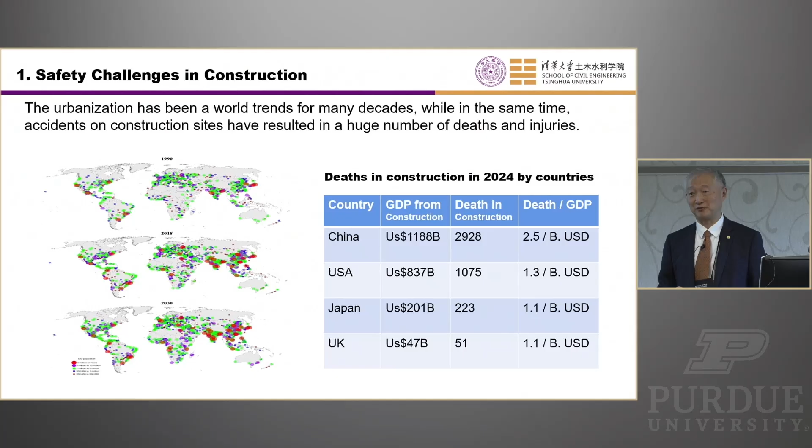So this is the outline, and we start from the safety challenges all over the world. As everybody knows, urbanization has been a world trend for many, many decades. And at the same time, accidents on construction sites have resulted in a huge number of deaths and injuries, no matter where. You can see some of the countries. In many countries, in the past decades, there's almost no improvement in on-site safety.

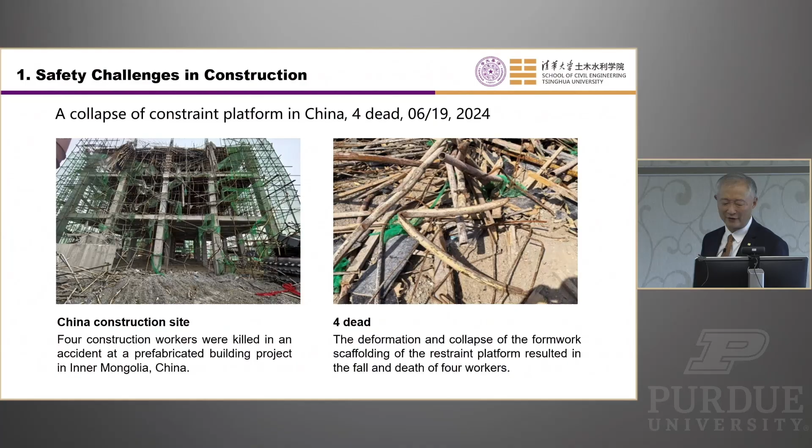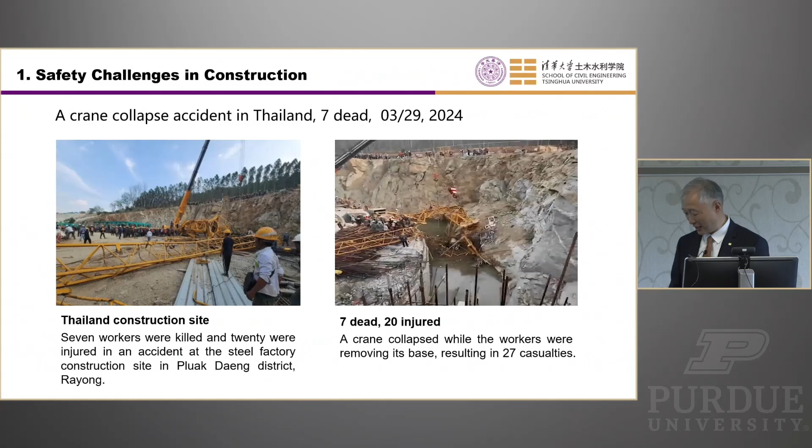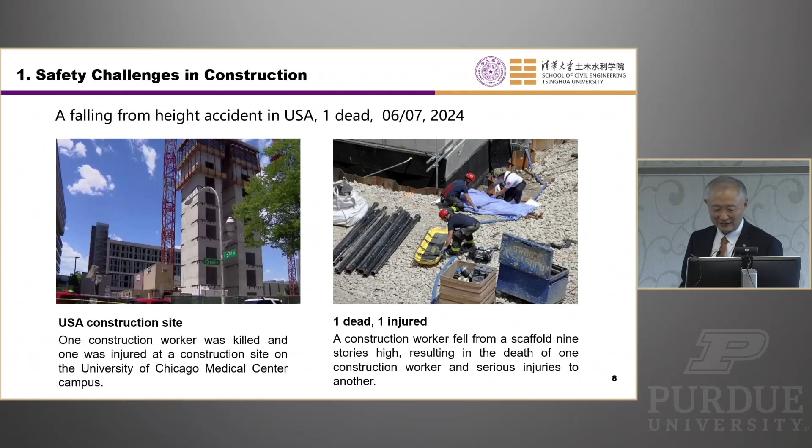And look at a few of the cases. This is a collapse of a constraint platform in China, 4 deaths, and 4 dead after a scaffolding collapse. And a crane collapse in Thailand killed 7 people. In the US, I'm not sure it's correct or not, but I think it's from the website, we got 1 death last year from falling from height. And we have more in Singapore, in many, many countries.

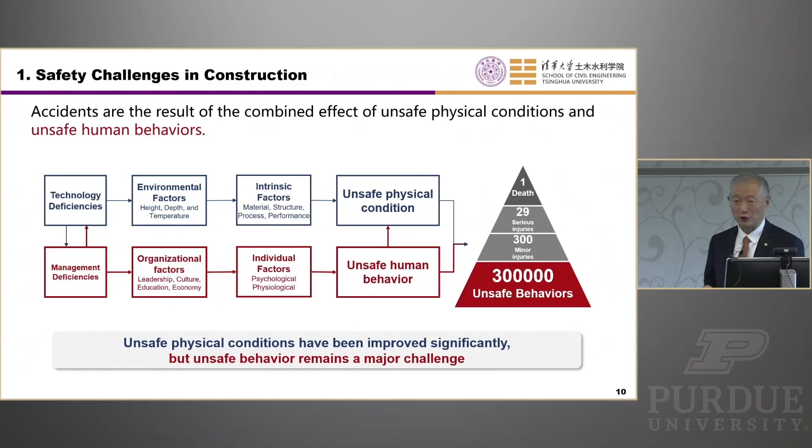So accidents are the results of a combined effect of unsafe physical conditions and unsafe human behaviors. Physical conditions are easier to improve rather than human behaviors — this is our belief. But if we look at all the statistics, unsafe physical conditions improved a lot, but not the same for unsafe human behaviors.

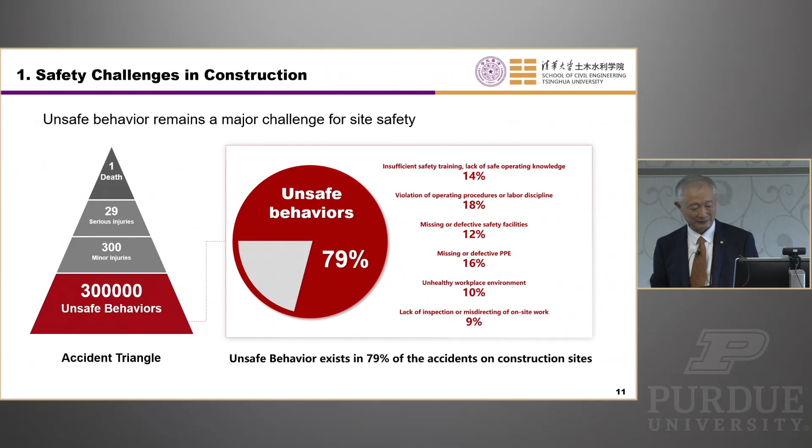So this is one year's statistics from China. We can find that nearly 80% of the accidents are related to human behaviors. And our work on safety started about 25 years ago.

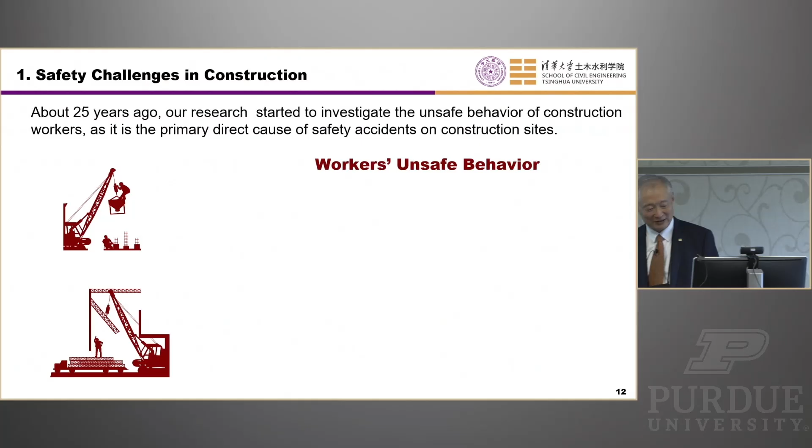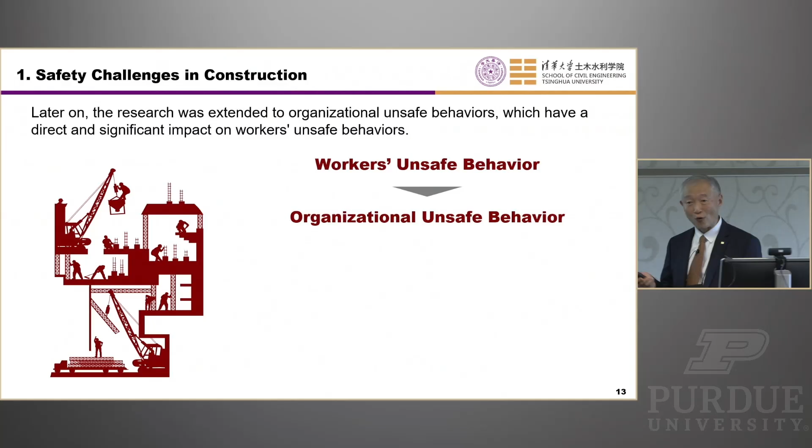At the very beginning, we started on the workers' unsafe behavior. Then we found that organizational unsafe behavior actually is more important. And further research found that safety culture and leadership play a very important role on unsafe behaviors. So based on this understanding, we start to look at the root causations of unsafe behaviors.

Based on so-called cognitive psychology, we separated the process of cognition into 4 major stages and tried to look at what kind of failure of cognition happened in the 4 stages, with 2 critical questions: in research, how to reveal patterns of unsafe behaviors at the cognitive level; and in practice, how to reduce unsafe behaviors from the cognition process. So the cognition process is behind the behavior, and we regard this as the root cause of unsafe behaviors.

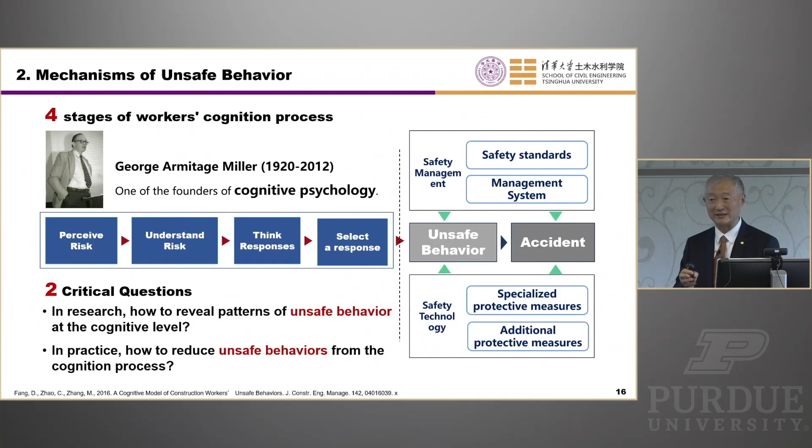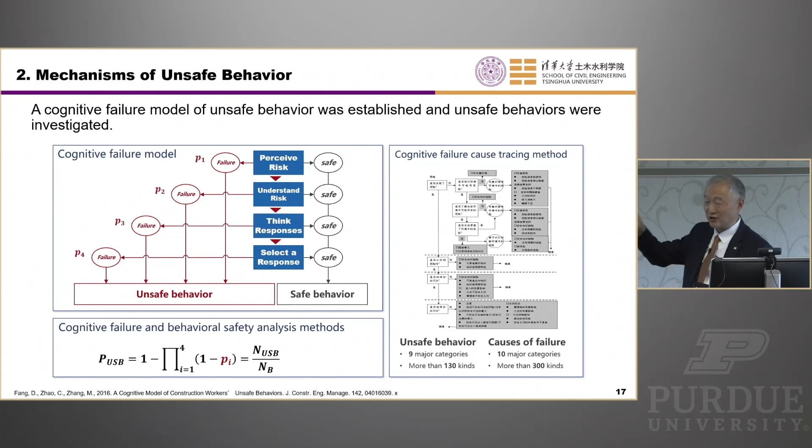So a cognition failure model was established to analyze the root causations, and this is the flow chart for us to identify each of the causations of unsafe behaviors.

And what we found, there are 2 kinds of failure mode. One is the so-called unintentional — that means the workers did not find and did not recognize there's a risk. The second is the intentional failure mode — that means they know the risk, they know it's harmful, but they still do that because they want a shortcut, they want to save their time, and so on.

Especially for project managers, they want to save money, they want to control the cost. So the unsafe behavior here, by definition, not only includes the workers' unsafe behavior, it also includes managerial unsafe behavior or decision-making.

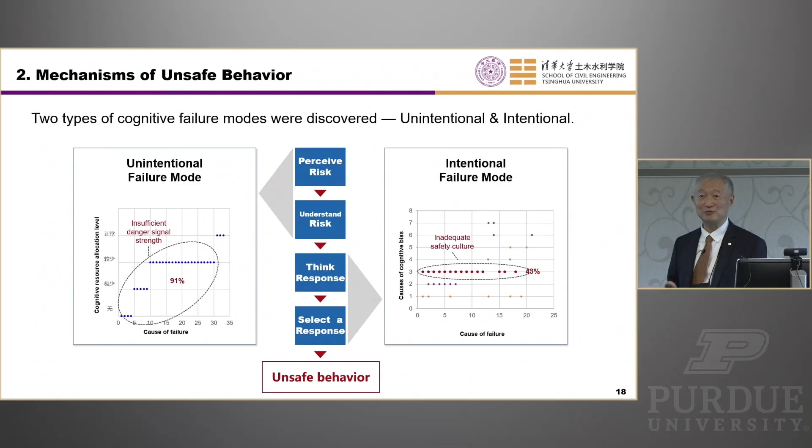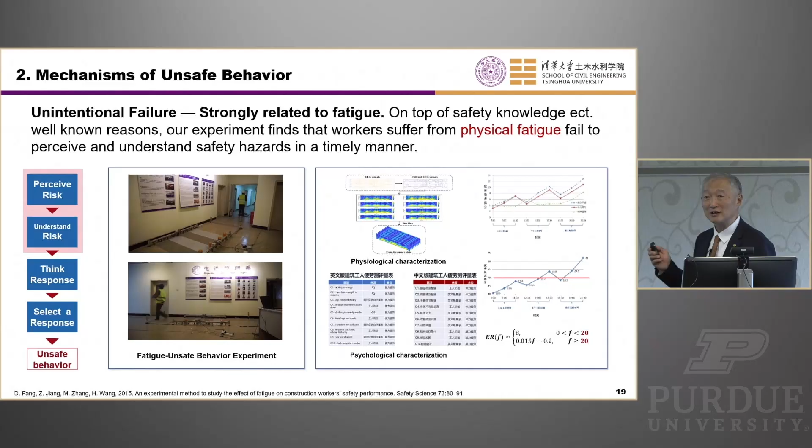So based on this, we looked at fatigue. That is one of the major reasons why the workers ignore the risks, both physically and cognitively. Cognitive fatigue is one of the major causations that we found.

There are a lot of research details I want to skip because I have only 15 minutes. So this is what we found: cognitive fatigue produces about a 2-fold increase in cognition errors and a 3-fold increase in behavioral errors. So cognitive fatigue is one of the very important reasons.

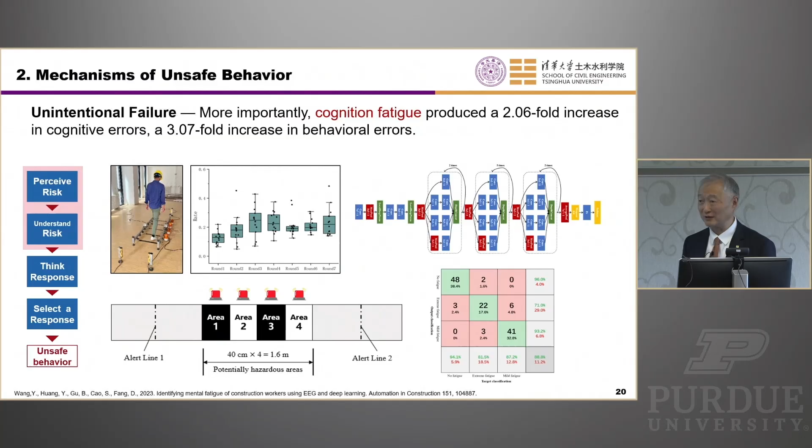On the other hand, for intentional failure, it's about culture. A better safety culture may help the workers make the right decision, and vice versa. So we established a model for safety culture, which we call the safety interaction culture, because on the construction site we have different organizations. They work together and bring different cultures to the site. There's a huge conflict within the culture aspect. So how could the project manager converge all of these cultures and build up their project culture in the right way?

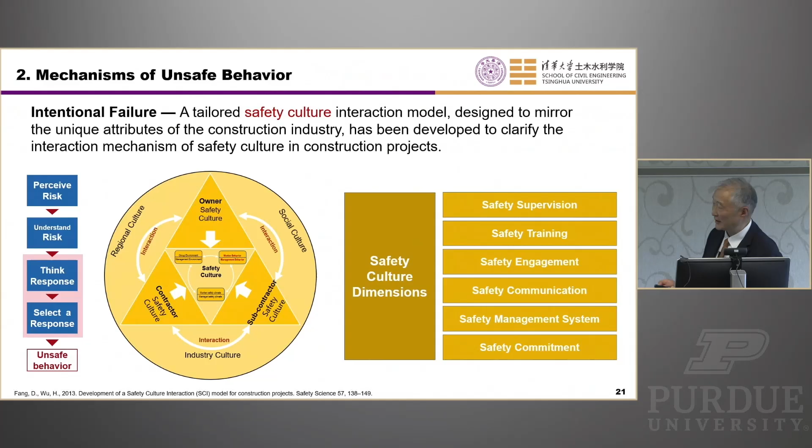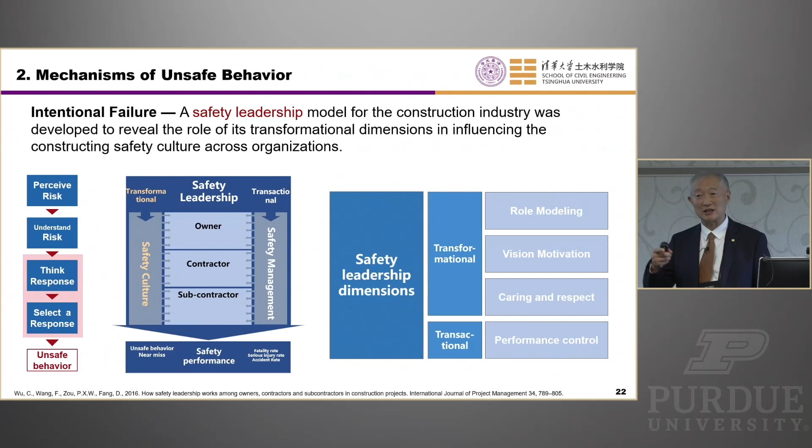We did a lot of surveys to try to dig out the key factors that influence behaviors. On top of culture, safety leadership was found to be one of the major factors that drive the change of the culture. So again, we did a lot of investigations on what type of safety leadership could create a better safety culture.

In the end, we found the role that leadership can have to influence safety culture in the right way, and further, the culture can influence the workers' and even managers' behavior. So we did an intensive survey of about 10,000 people whose unsafe behavior we observed, then talked to them with a questionnaire survey to find out why they made a mistake. Based on this analysis, we found the leadership, culture, and behaviors relationship.

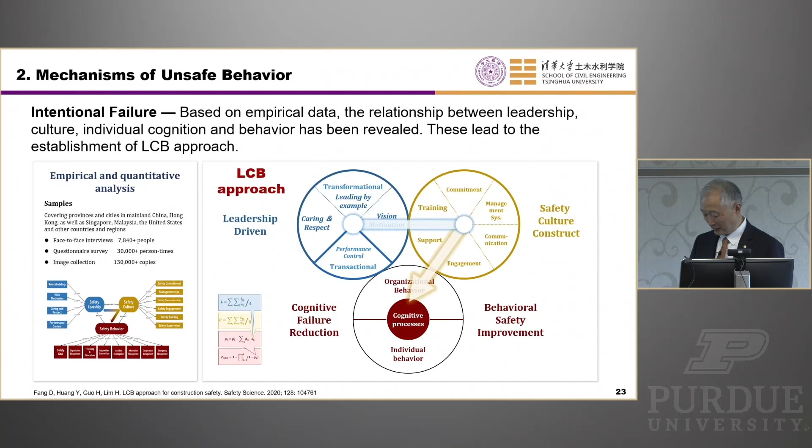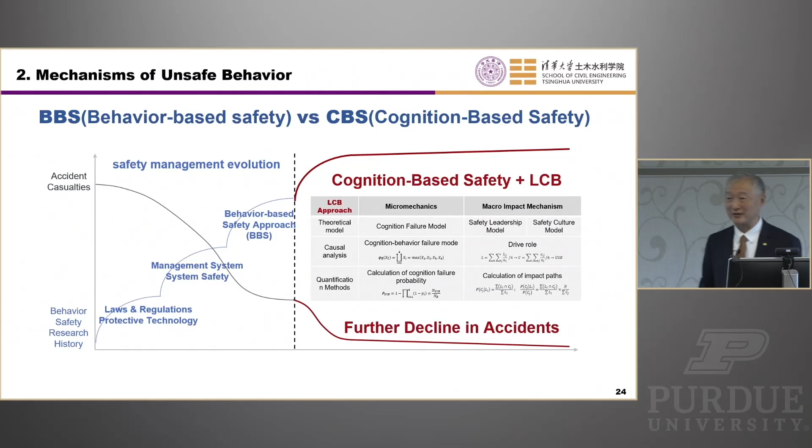Based on this, we started to develop approaches we now call the LCB approach to correct unsafe behaviors induced by either workers or managers. We hope that cognition-based safety can be a further step beyond behavioral-based safety, because cognition is the first step of unsafe behaviors. Based on this research and understanding, we started to develop relevant technologies to tackle this issue.

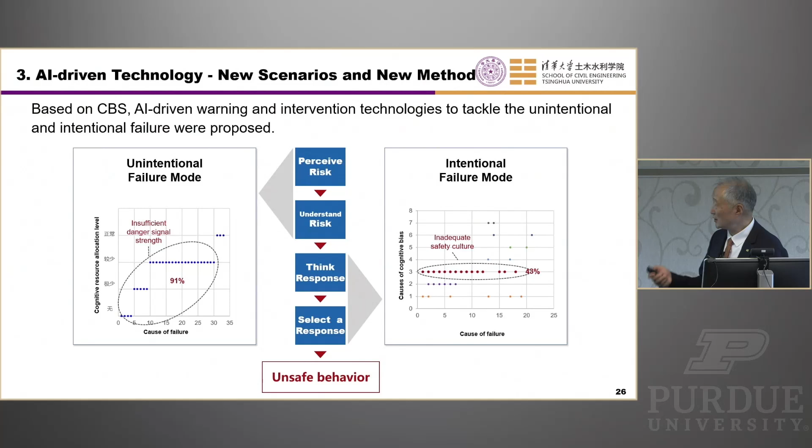This is what we identified as two kinds of failure mode. For the first one, unintentional failure mode, we tried to develop various kinds of technologies, either EEG or computer vision technologies, to early warn the workers about their unsafe behaviors. These technologies were developed by my students, and two of them are sitting here.

We have one technology based on EEG, which detects the fatigue of the workers. The second one is based on computer vision. And the third one is also computer vision based, but we use deep learning to identify unsafe behaviors. This equipment can be installed on any kind of equipment, and now it can not only detect the distance with the workers, but also recognize their unsafe behaviors.

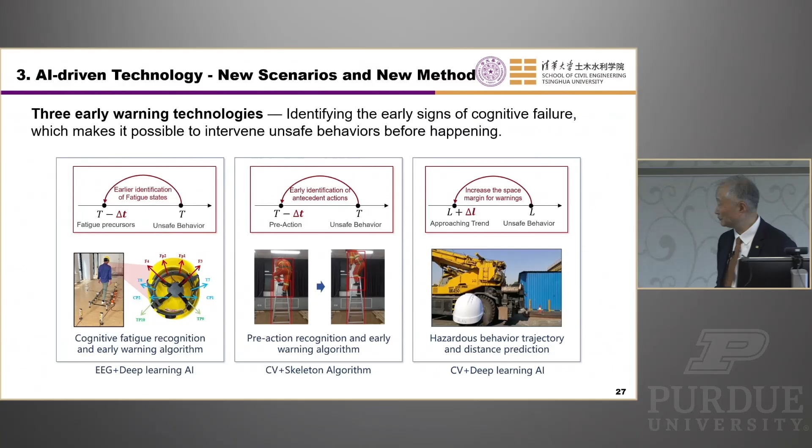On the other side, for intentional unsafe behavior, we developed two software tools related to safety culture and safety leadership, as a kind of survey tool to identify the defects of managerial factors amongst organizations. We also developed standards for safety culture and safety leadership assessment that can be used by industry, enterprises, and project teams.

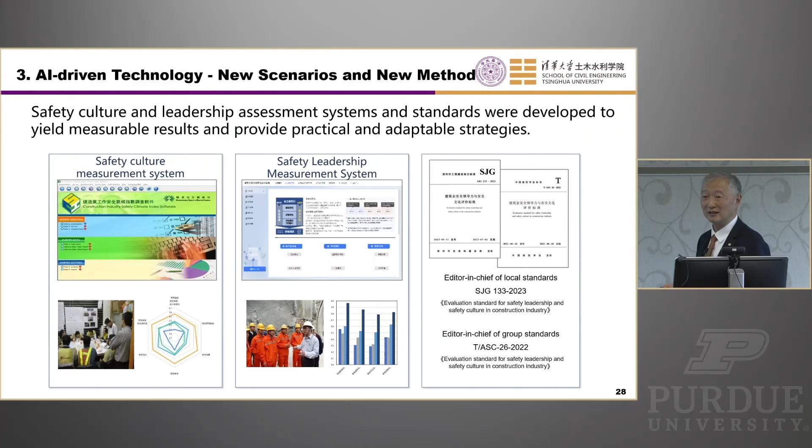Based on these two kinds of technologies, we tried to integrate them together into what we call BeSafe. It's an AI-driven safety management system based on technologies that detect unsafe behaviors, and we also have the LCB tools—that means the leadership and cultural survey—on the cloud. We connect all these technologies, so it's not only good for detecting behaviors, but we also provide approaches to solve the problem, to cut the root cause of the unsafe behaviors.

In many cases, we do have new technologies, good technologies, but the site doesn't want to use them, even if they implement the technology on the site. The workers may not like to use it because they feel uncomfortable in many ways. So if, on top of the technologies, we create a better safety culture, then the technologies can be implemented more easily.

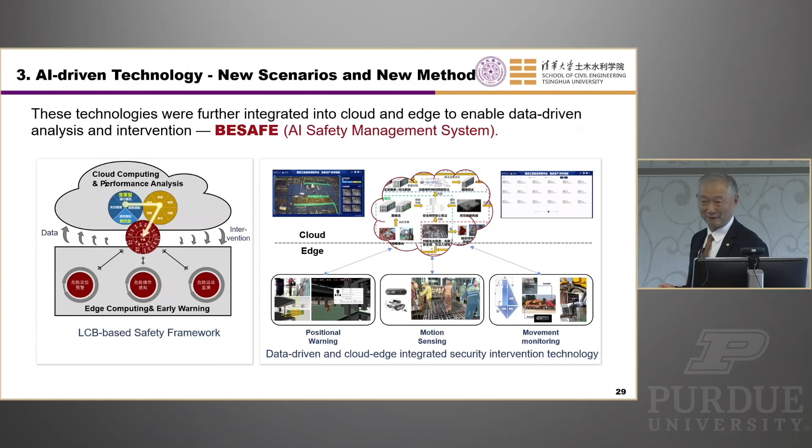So we tried to put all these things together. We call it BeSafe, the system. This was recognized, 2 or 3 years ago, by the Construction Innovation Award in Hong Kong. Now it's also implemented in Hong Kong in some of the companies.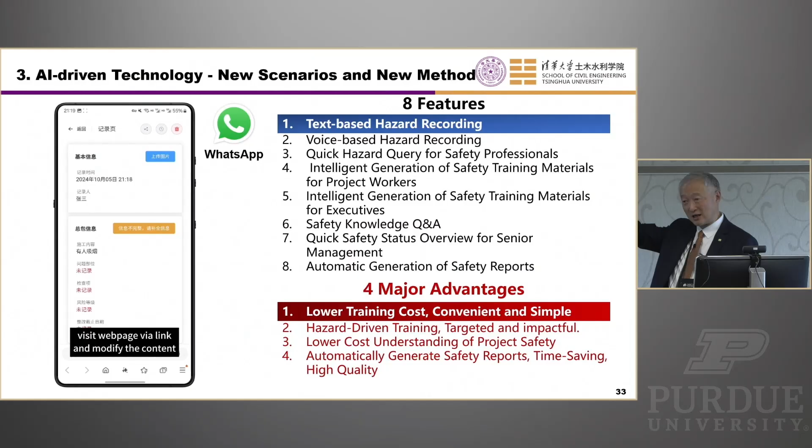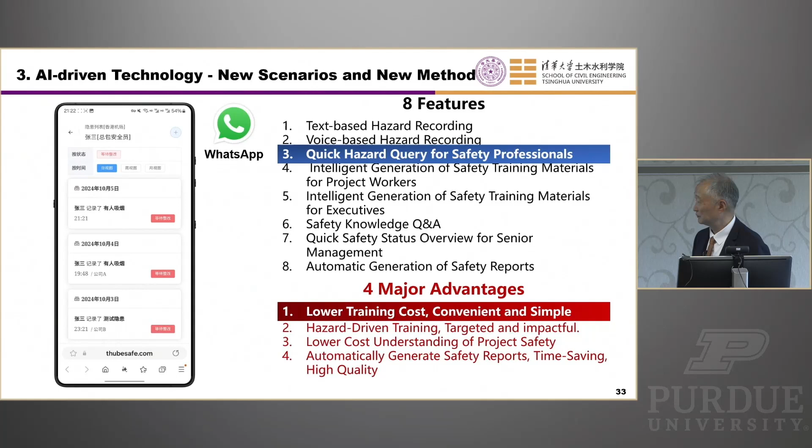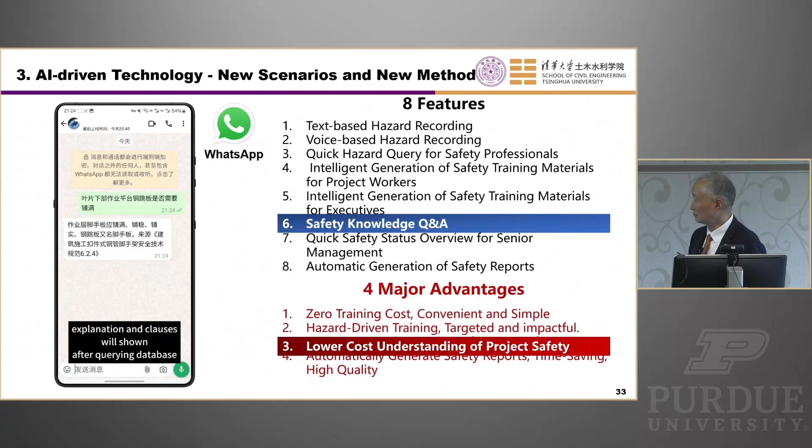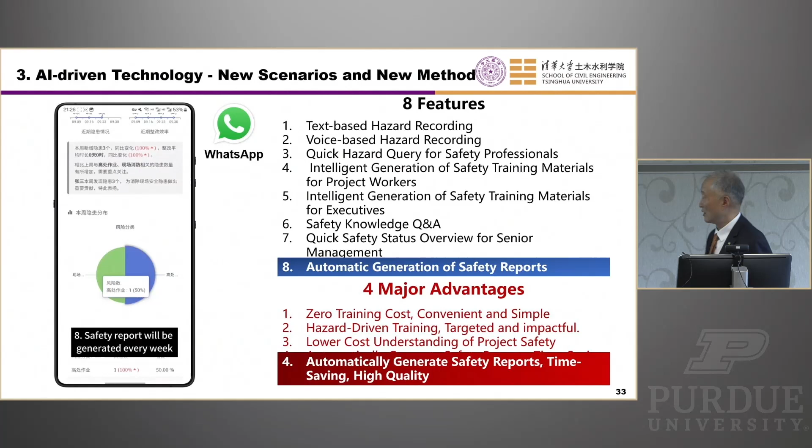Here is an example: first, visit the web-based page and modify the cloud content; second, on the mobile phone, submit a hazard through voice, such as reporting someone smoking, and after recognition, visit the web page and modify it. Third, enter a checklist for the hazard list. Fourth, generate daily training content based on hazards, answer questions, and check results. Fifth, generate training content for safety managers, who watch the training video and answer questions below. Sixth, ask for professional knowledge, and explanations and clauses will be shown after querying the database. Seventh, safety managers can ask about the latest situation. Eighth, a safety report will be generated every week to reflect the changes and distribution of hazards submitted.

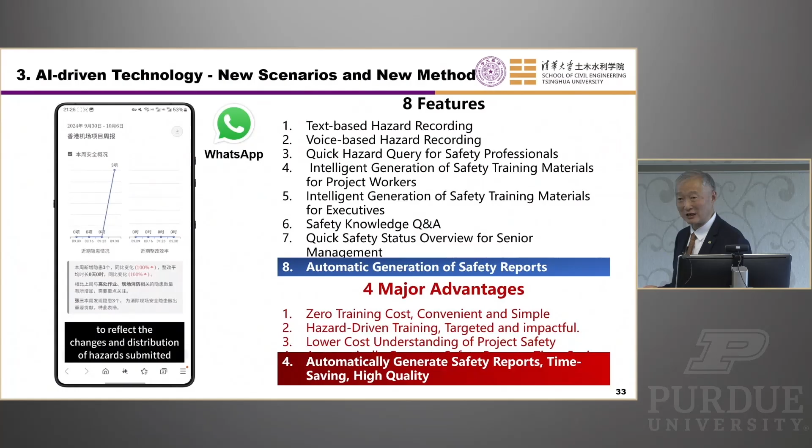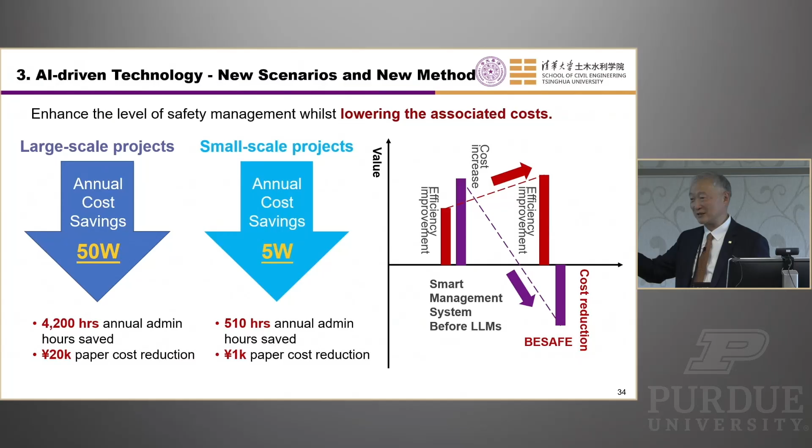So now we made it as a product. Many companies try to purchase it to implement on their sites.

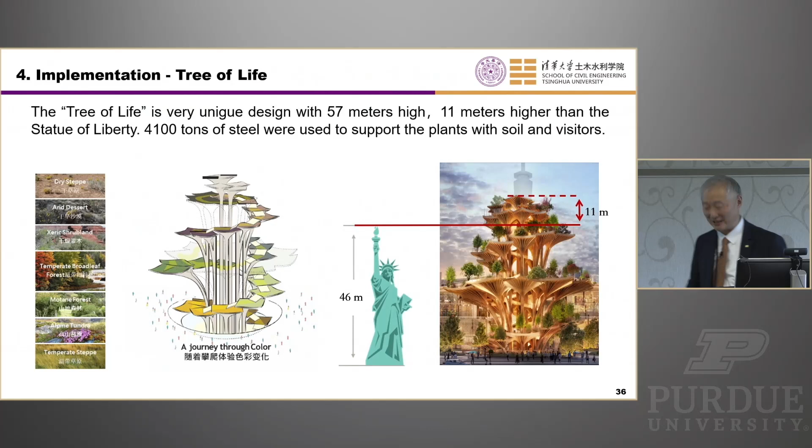One example to show how we implement this technology is a project called the Tree of Life. This is a very special project designed by an American architect - a tree made of steel almost 60 meters high. They built the tree with various kinds of plants so guests can go up to the top, as a kind of entertainment facility in the center of a commercial complex to attract customers. It was very difficult to construct because the surroundings are all buildings under construction, so the site is very limited, and 4 mobile cranes were used to erect all the steel.

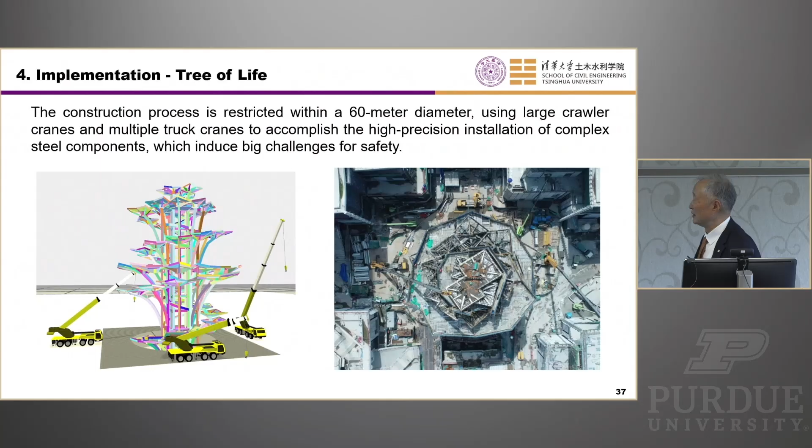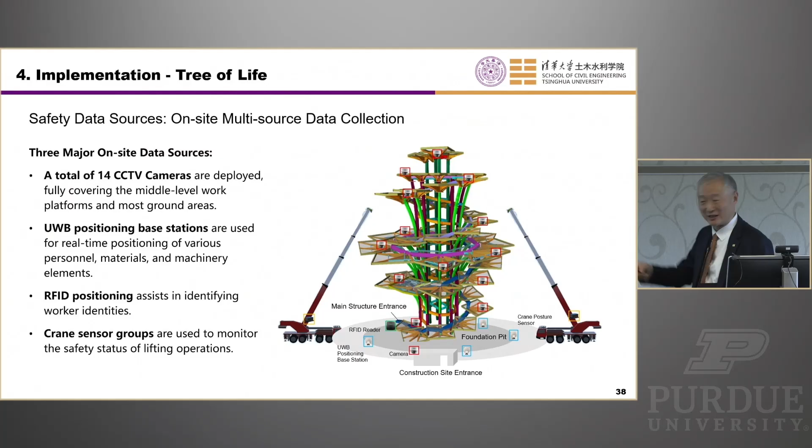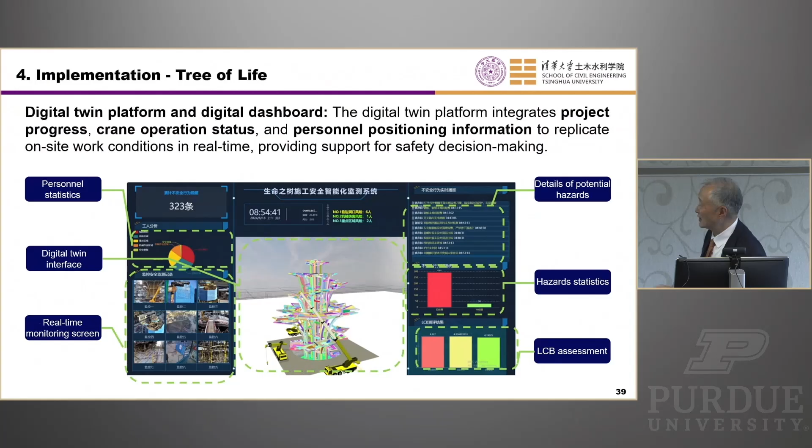So in the whole process, our technologies were fully implemented, including... I just raised some of the examples, not all of the technologies we have on this project. So you can see this screen shows the functionality of the technology.

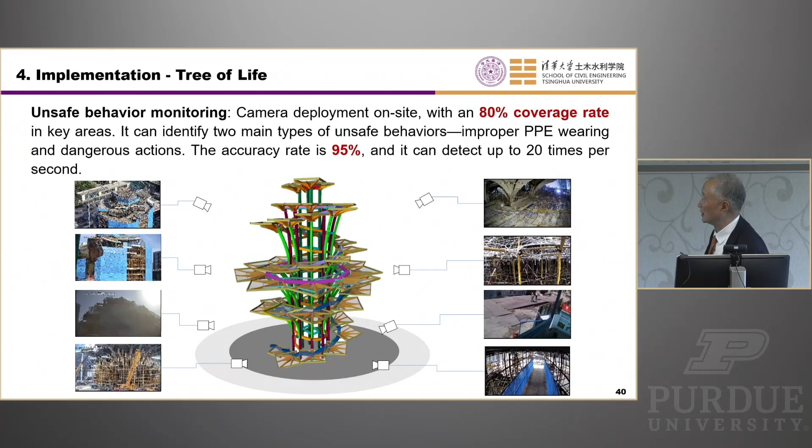We have cameras at different angles to detect unsafe behaviors and positions.

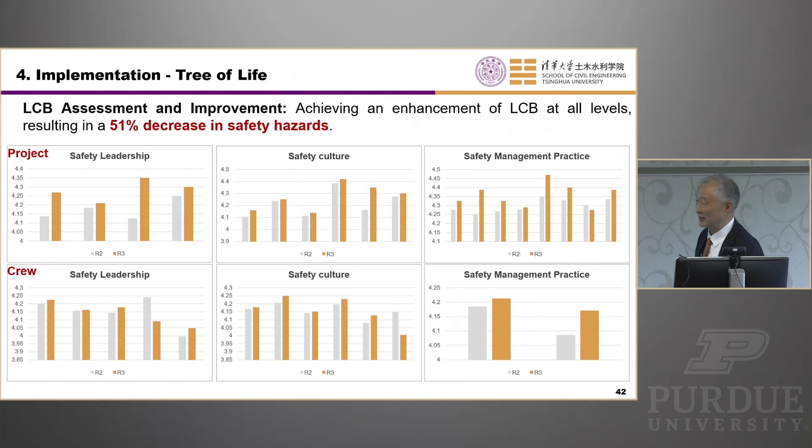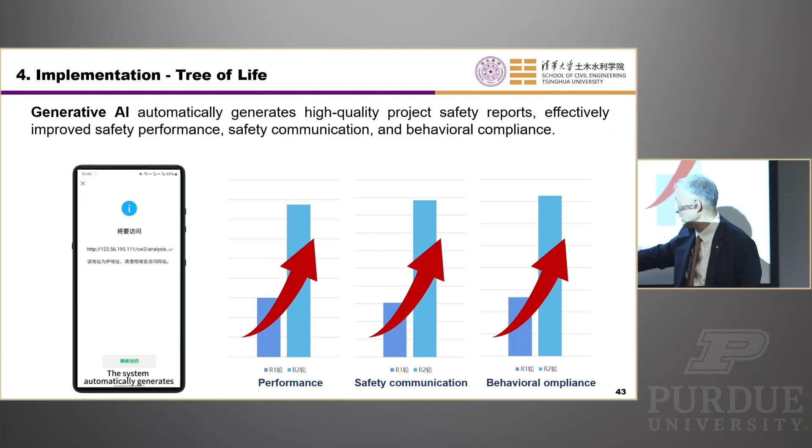This is some of the indexes. You can see the growth, the improvement in performance in different ways. Some key performance indicators, like communication and compliance, increased significantly.

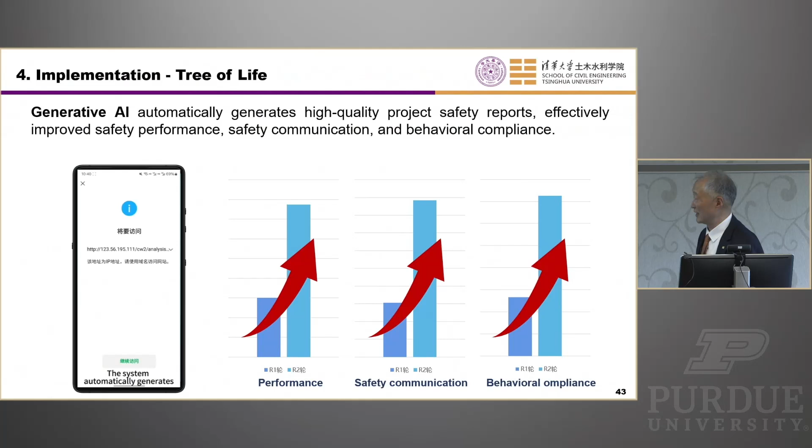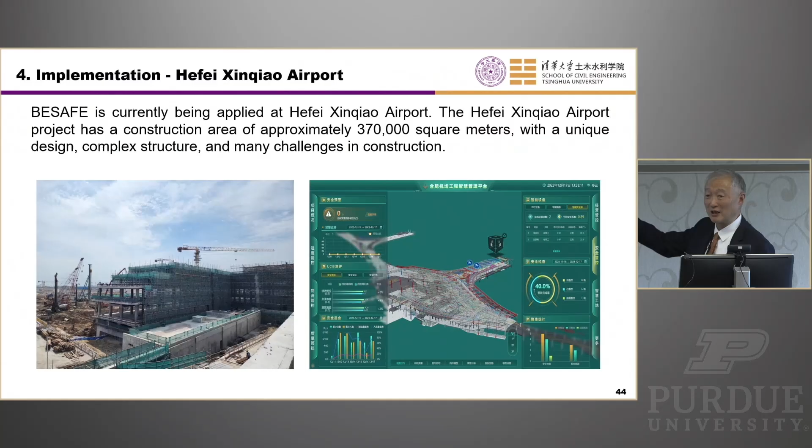More airport projects are using our technology on the way, and it's still in use. Just now I got a message from one of the projects about their performance. Now we collaborate not only on single projects, but with contractors to cover most of their projects, because the technology is all online.

Okay, this is all I would like to share with you. Maybe I went too quick because I don't want to waste your time. Anyhow, your comments are welcome. Thank you.

So what has been the reaction of the contractors? You use this technology, it produces good results - are you getting any resistance from contractors?

There are so many contractors. We try to introduce our product at several conferences or occasions. Many of them approached us, meaning they are interested in it. Then we let them use it free for a few weeks or months. If they feel comfortable, they start to pay. If they don't like it, that's okay too. But now the feedback is very positive - one company came to us wanting to use it on all their projects, more than 300 projects.